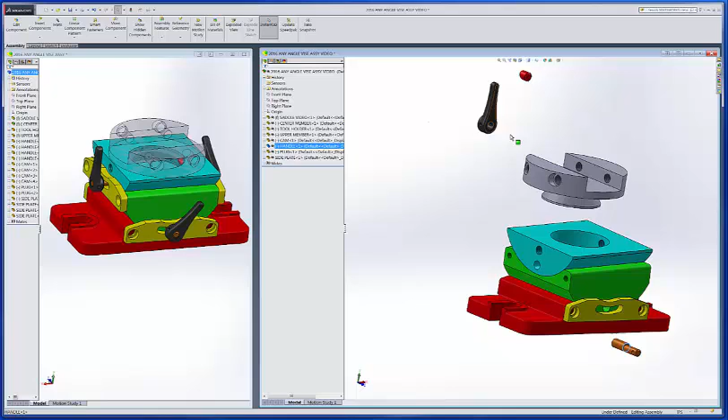Okay, so let's continue on. What I want to do next is put this cam in place, and it goes over here, and then we'll also do the handle. Before I do that, I think I'll change the transparency of this piece. You can do that right here.

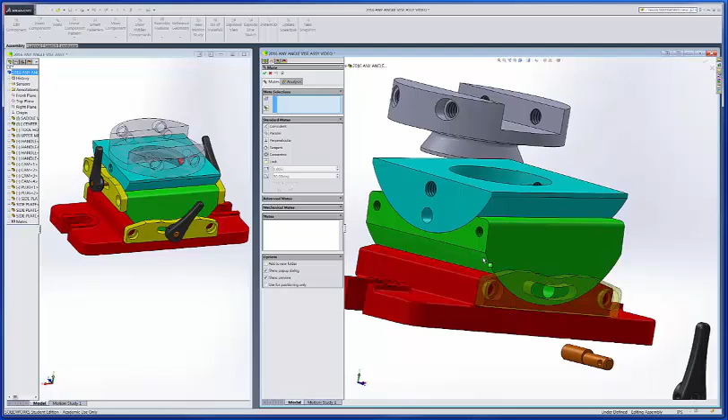That's a hide, and this is changed to transparent, so that I can go in here and see what's going on with this cam. Now I want to do the mate again, and I'll zoom in here, grab this cylindrical shape and this cylindrical shape, and we'll accept that. Those two pieces are locked in then.

Okay, and now I can see that it's along that edge, or excuse me, along that cylinder, but I need this face right here to be flush with that face right there. And I'll accept that.

Now I am going to fix this piece here, the green piece, so that I can rotate this around. But basically that's what the cam does. The cam, when it was rotated up, it's going to be pushing on this slot in this piece that I've made transparent, which forces this center member down, and the friction then holds it in position. So that's what you're looking at as far as this thing working.

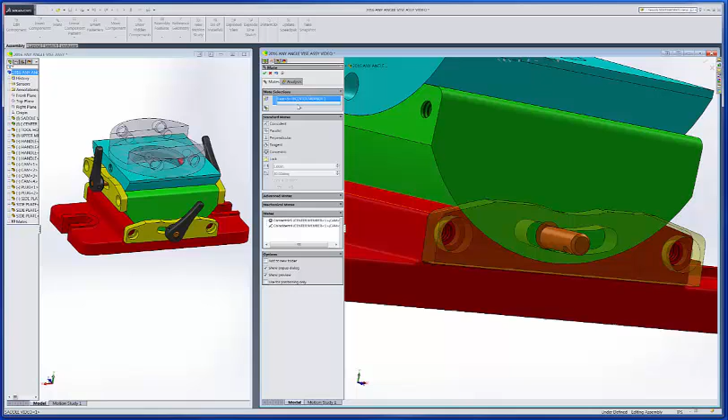Now we're not going to worry too much about this other cam portion. That actually would interfere there, wouldn't it? So we'd have to be careful there eventually, but we won't worry about that just yet. I'll clear the selections here, and now I need to put the handle in place, so I'll move this over.

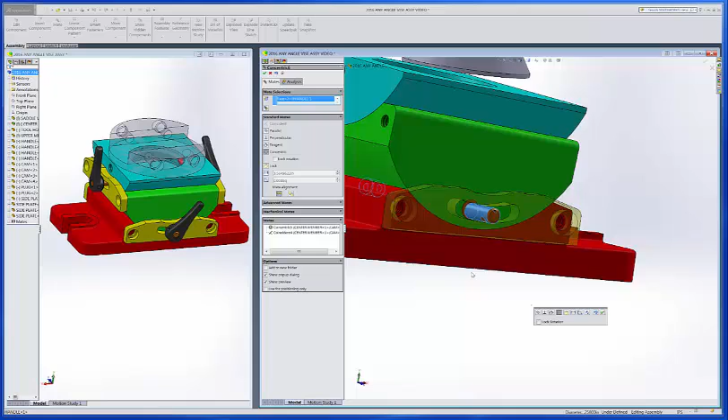Let's see, the first thing I probably would want to do is put this cylinder, and be careful there, gotta get that cylinder. And now we can't see that, but it might need to be flipped, but we can't see it right now, so actually I'm just going to undo it.

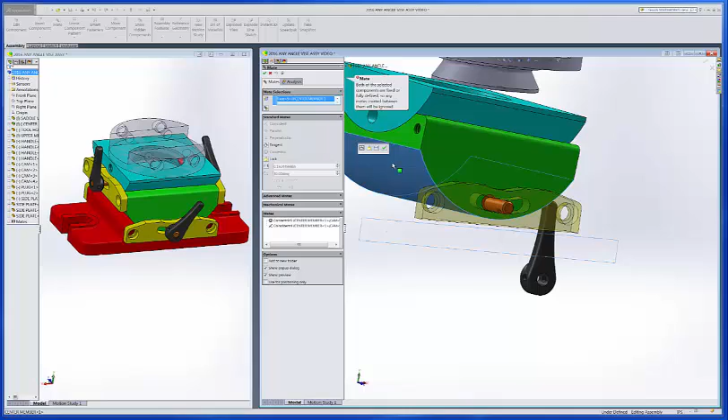Okay, and what I'll do is I'm going to go in here and hide this base, or the saddle, whatever you want to call it, and I'm going to hide this piece. I could, if I wanted to, hide this piece too, but I won't do that just yet.

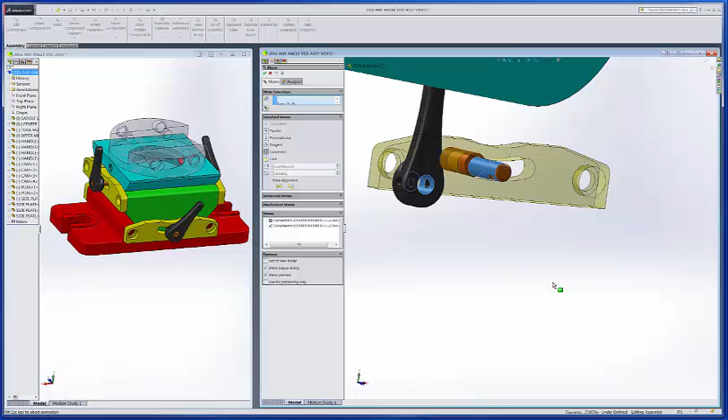So let's go in here and look at these. Alright, so I'm going to clear all the selections there, and I want this face and this face to be concentric. Now that is the orientation that I want on that.

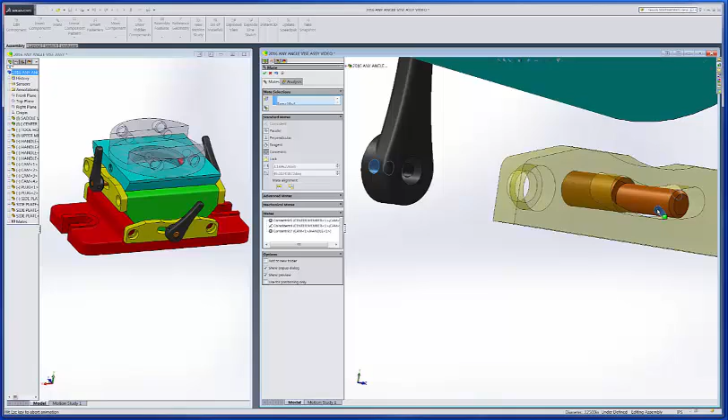So if it weren't, what I would do is flip it, and you can see that flips that back and forth. That is the one I want. Okay, and then the next thing I want to do is grab one of these cylindrical shapes and this cylindrical shape, and that creates a mate there. With those two mates, everything should line up there as far as the handle and the cam is concerned.

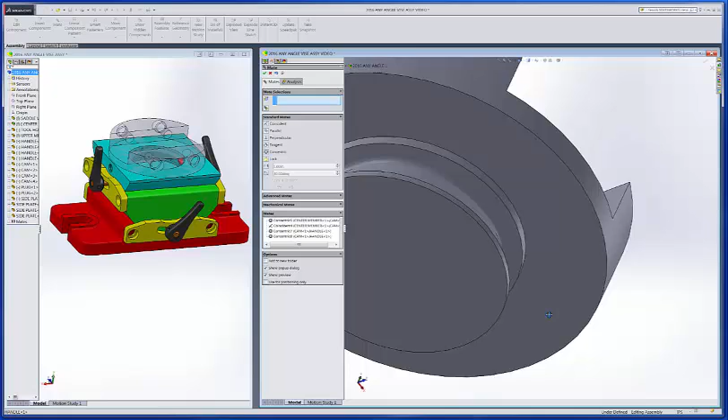Okay, now eventually we'll put a spring pin, if I can find it. Eventually we'll put a spring pin in that hole right there, so those pieces would be held together.

So I'd want to close that and hit the save button probably.

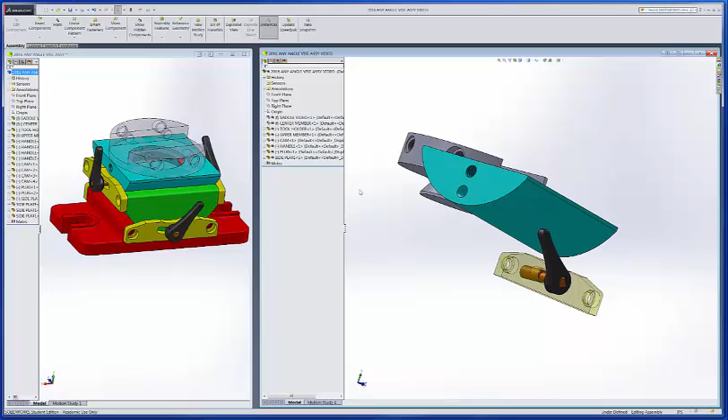Okay, now if you want to unhide those, note over here on the left side, these pieces are hidden, so we could change the transparency, or actually those are hidden, aren't they? So we don't need to change transparency, we just want to show the part. So we'll go in here and hit this one too.

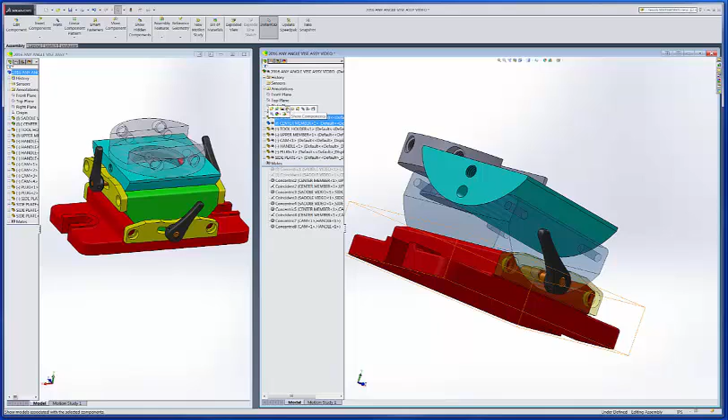Okay, and then now I could also change the transparency of this piece. Could be put back probably now, couldn't it? Let's turn that off. It toggles back and forth.

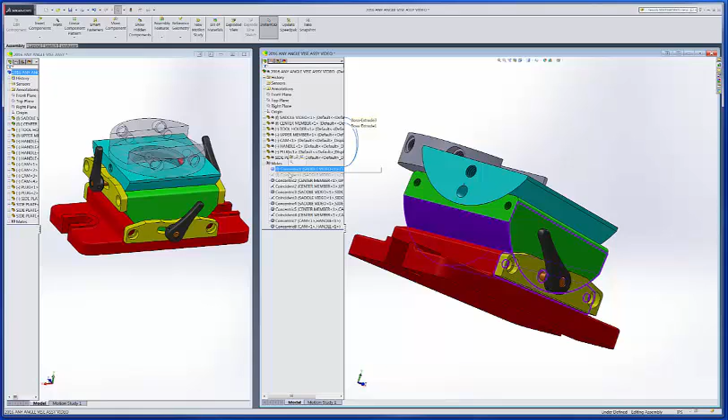Also note down here at the bottom we have the different mates, and if you click on a mate, you can see what components are mated to each other. They're highlighted. There's our cam and handle. Now the reason why these don't look like they're highlighted is because remember we fixed this component here, so if we make it float, they come back and they're active again.

So I would want to hit save, and then that's what I would have to do for the rest of these components. So I might want to insert some components again and go in there and look for side plates again. Now I don't see it here.

I haven't been able to find it yet in this version, but typically you can insert one piece more times than not, but for some reason it keeps showing up that that's not the case. I mean, I ought to be able to go in there right now, and I don't see it over here. I should be able to go in there and keep hitting that and keep putting that component in.

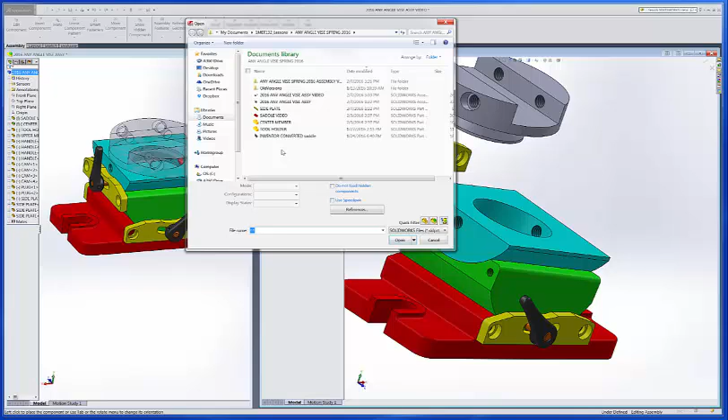Of course, I can always right click and there should be a recent commands, insert component, and it comes back to the proper folder. I want the side plate again, but in the old days you could click on that and click on it again and it would just keep putting the components in. So I need one more, so we'll go ahead and hit the recent commands, insert component.

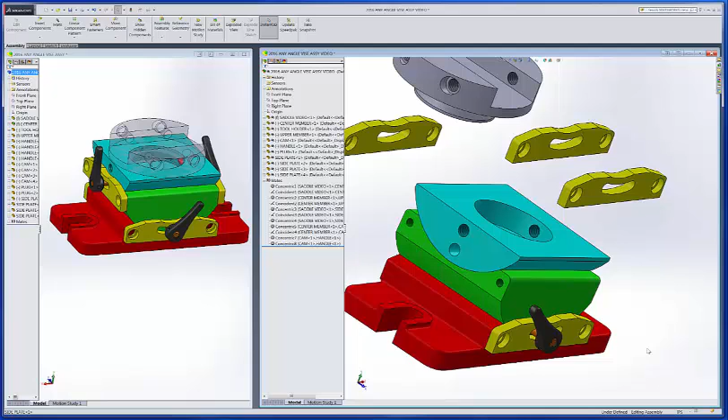Okay, so we've got all those, and we'll just have to go in and orient those properly as well. So we'd have to do the handles and such before that. So I think I'll stop with this one, then I'll show you how to do the top components, and we'll go from there.